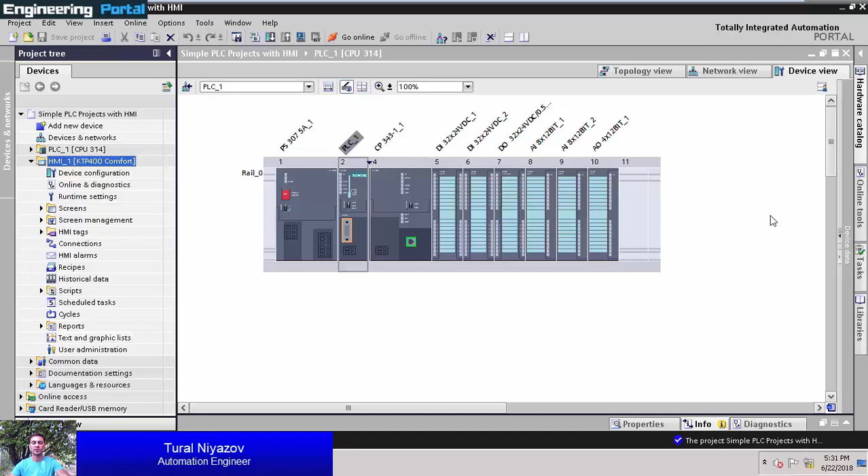This is my panel. For time saving, I created the hardware configuration and also inserted the HMI panel into my project. In previous lessons you learned how to create hardware configuration and add an HMI panel to your project, so I won't do it again.

Let's introduce you to this program. This is the Siemens KTP400 HMI panel. Here I have two tanks. Tank 1 is full with water and tank 2 is free. I want to discharge tank 1, bringing this water from tank 1 to tank 2.

The water levels are measured with level sensors. Level sensor 1 measures the water level of tank 1, and level sensor 2 measures the water level in tank 2.

I have three buttons. The start button's contact is normally open. When I press this button, the contact closes, and when I release it, it becomes normally open again. The stop button is normally closed; when I press it, it opens, and when I release, it closes again. The reset button is also a normally open push button.

Here I have two LED lamps. The green lamp indicates that the system is running, and the red lamp indicates the system has a fault. When the system is running, the green lamp turns on. When a fault occurs, the red lamp flashes.

I have an electromagnetic valve outside tank 1. Water waits here. When I press the start button, this valve energizes and changes to green color, and water goes from the electromagnetic valve to the pump and waits here. The running lamp indicates the system is running.

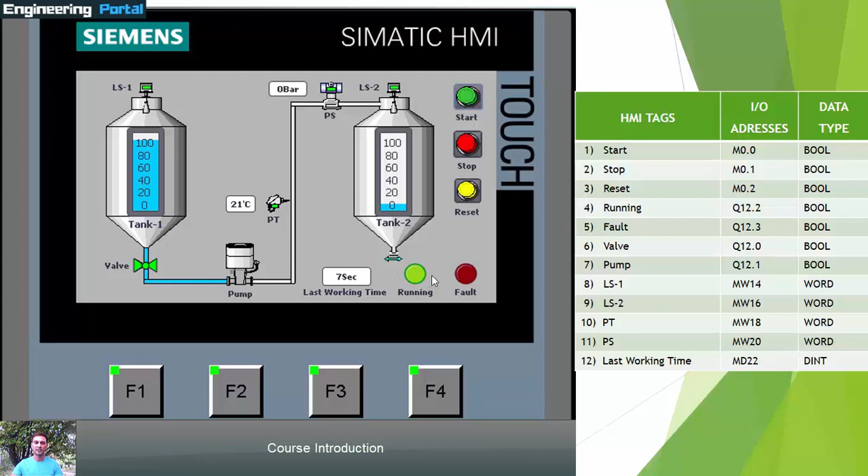After 10 seconds, the water pump energizes. When the water pump energizes, water flows from tank 1 to tank 2, so you can see the water level in tank 1 decreases and the water level in tank 2 increases.

In this tube I have two sensors: one is a PT100 type temperature sensor and one is a pressure sensor. This sensor also works with 20 mA signals.

If a fault occurs in the program, the system stops immediately and the fault lamp flashes, 1 second on and 1 second off. You can ask, when does a fault occur in this program? When temperature is over 30 degrees, when water pressure inside the tube goes over 10 bar, also when the water level in tank 1 is 0, no water inside tank 1, and we press the start button, the error lamp will flash again and we can't start our system.

Also, when our system works, water flows from the electromagnetic valve to the pump, but where is the water? If our pressure sensor doesn't measure water pressure, this means the tube is broken. For this reason, the system stops and the fault lamp flashes again.

In this window we can see the current temperature value, water pressure value, and last working time. If we press the start button and no fault occurs, the system works for 60 seconds. After 1 minute, the system stops again.

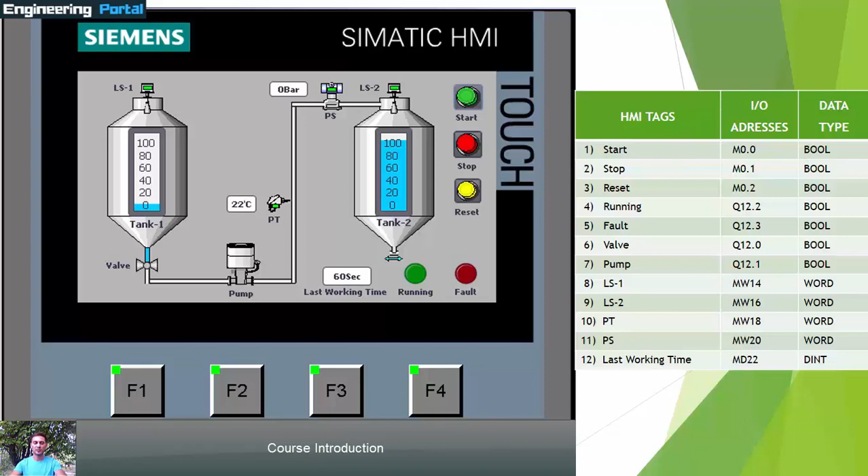Here you can see the addresses. In the PLC programming, we need additional addresses. For time saving, I added this in the default tag table. Today I will write the PLC code of this system and simulate it.

Let's begin programming. For programming, I go to program blocks, main OB1, and add networks. The program will run from network 1 to the last network. First of all, I need to measure the water level inside tank 1 and tank 2.

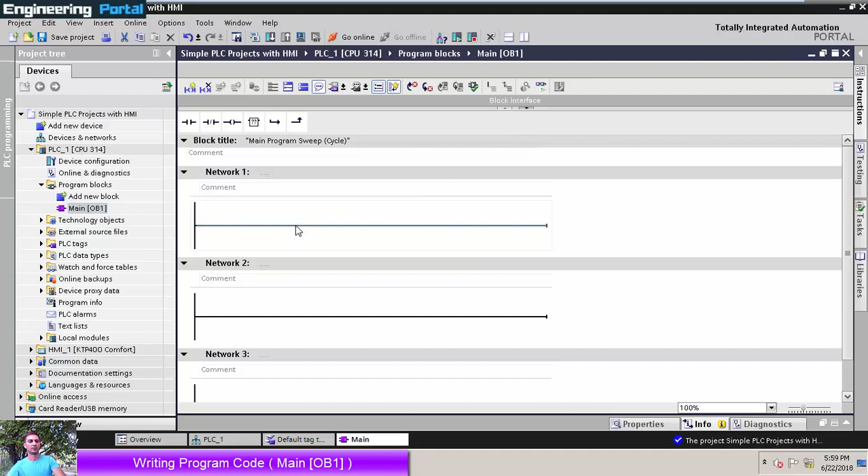Because we use the PLC simulator, we must use move blocks. You can add this block from here also. Block move, okay.

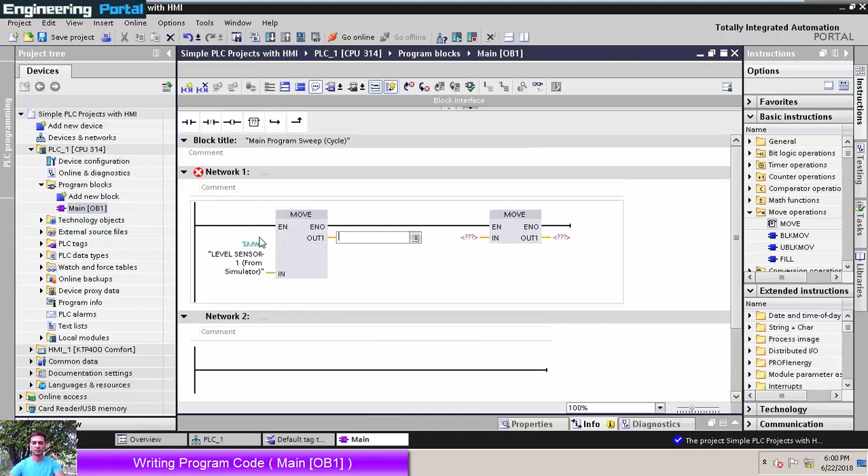I want to connect the level sensor 1 tag from the simulator. This one is memory word 2. I write memory word 2 from level sensor 1 to the destination. And here, from level sensor 2 to the second destination. This means I move the value from memory word 2 to memory word 14, and from memory word 4 to memory word 16.

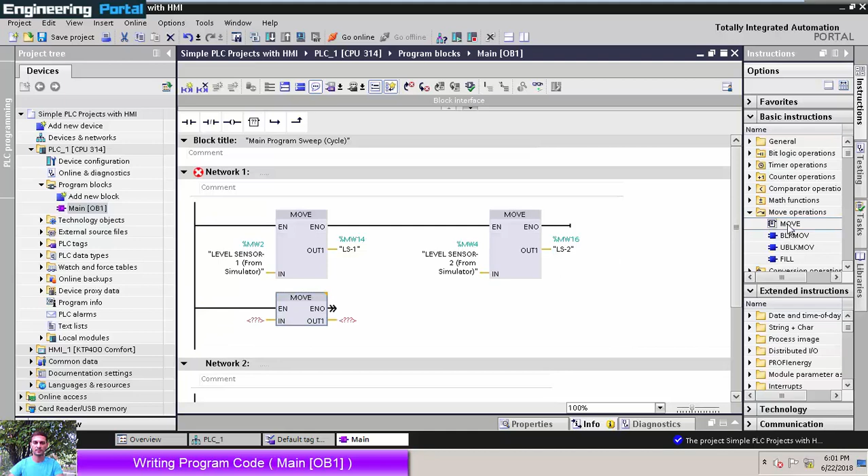I want to measure water temperature and water pressure inside this tube, so I need to add another move instruction. Connect this tag: PT100 sensor from simulator, memory word 6. I move memory word 6 to this tag, PT, memory word 18. I write PT here. Click OK.

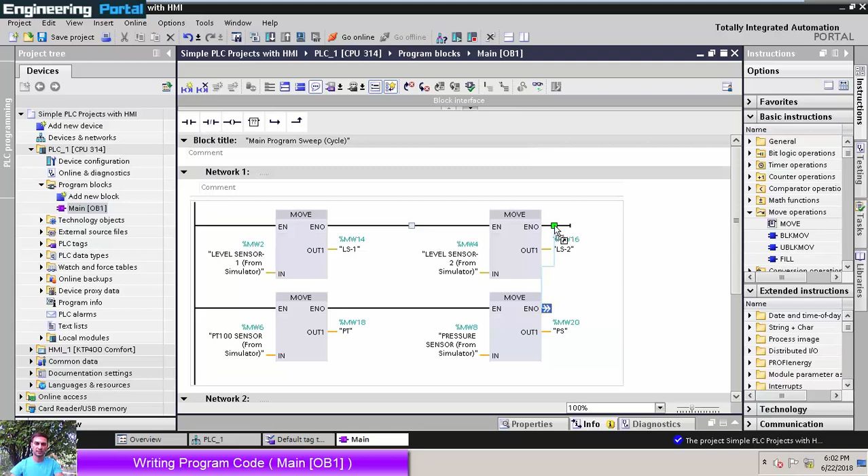Now the pressure sensor: pressure sensor from simulator, memory word 8, moved to the pressure sensor destination. And connect these outputs. This network cannot be left open, so we must add a coil here. Give it a tag, move is OK, M0.5.

This one is analog network.

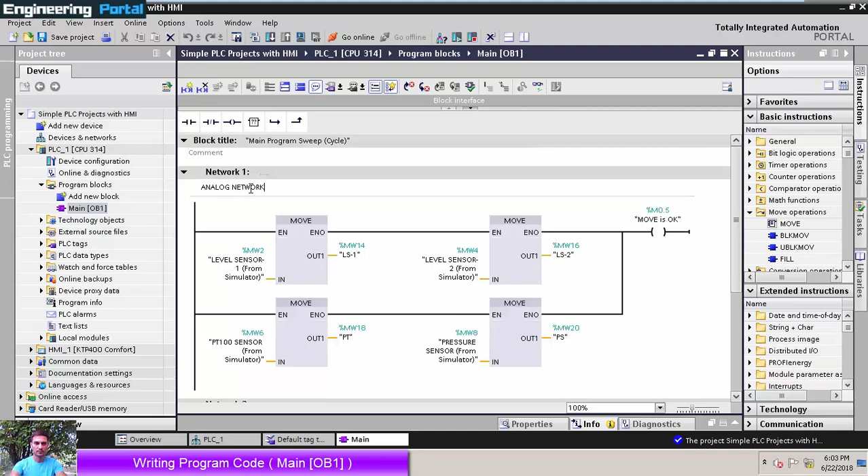Click to save. In the next network, what we need to do? We need to start our system. So I go to add open contact and set reset instruction. We can add this instruction also from BitLogic operations tree and select this one and drag and drop to here. Okay, now we can delete it. Give an address of start button. Start button is M0.0.

This one is run command over stop button. Yeah, we must add negative trigger and give an address for negative trigger 1. Okay.

This stop button is normally closed, so this open contact of the stop button is also closed. And when we push the stop button or wire is broken, this negative trigger passes to the reset input of this block and run command turns off.

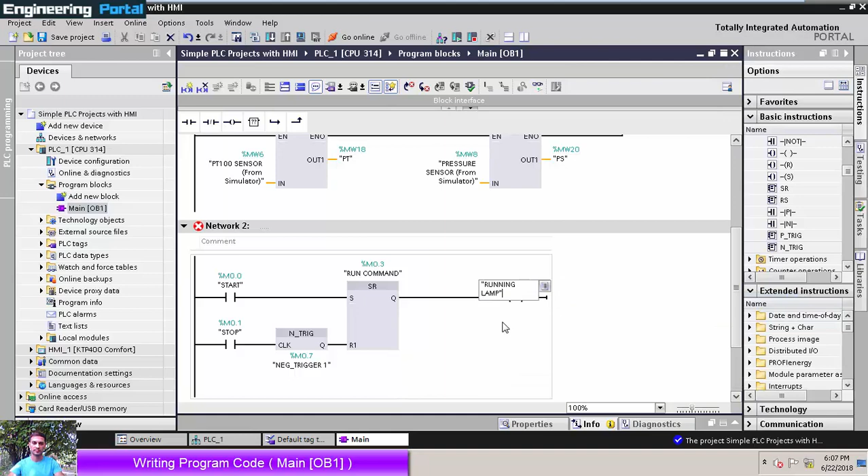So go to the next network. Here what we need to do, then I press the start button, electromagnetic valve energizes immediately. So I need to add open contact and the coil for the valve

and run command. After what's going on, when the valve energizes, water flows from this tube to the pump. The timer started timing. After 10 seconds, water pump energizes. Let's do this.

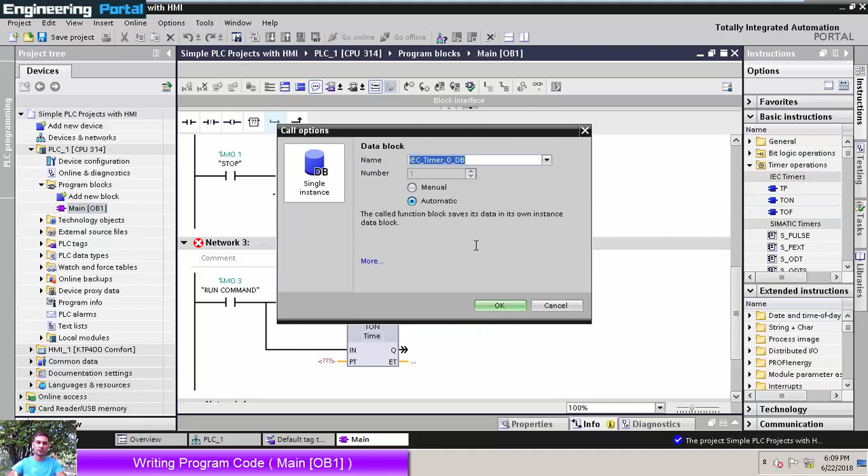Close this, and go to the timer operations. We need to add here on-delay timer. Click twice on it and data block creates automatically. Click the OK button. This timer has 2 inputs and 2 outputs.

In is enable input. PT is preset time value. I need to give 60 seconds to the preset value. Q output is digital output, which will turn on after 60 seconds. Time is end. And ET value is analog value.

So we need to connect this output to the current time value tag. Data type is time, 32-bit value, MD10, okay?

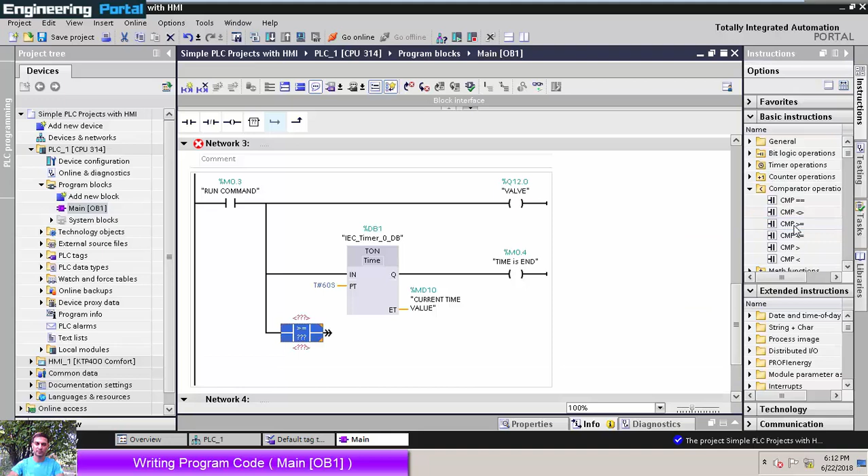What we said, after 10 seconds, water pump energizes. Give a new arrow, put here comparator operations, greater or equal, and another coil. What we need to do, when the current time value equal or greater than 10 seconds, the

pump will turn on. I want after 60 seconds system stopped. So I need to add an open contact, connect it, and give an address, time's end.

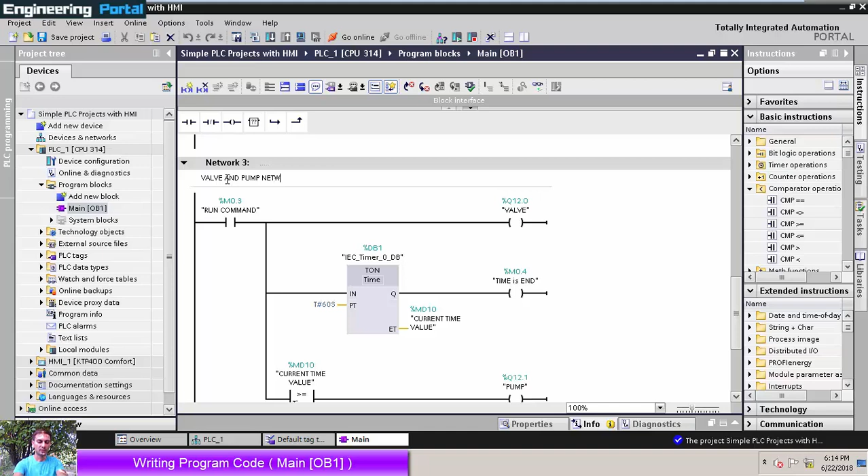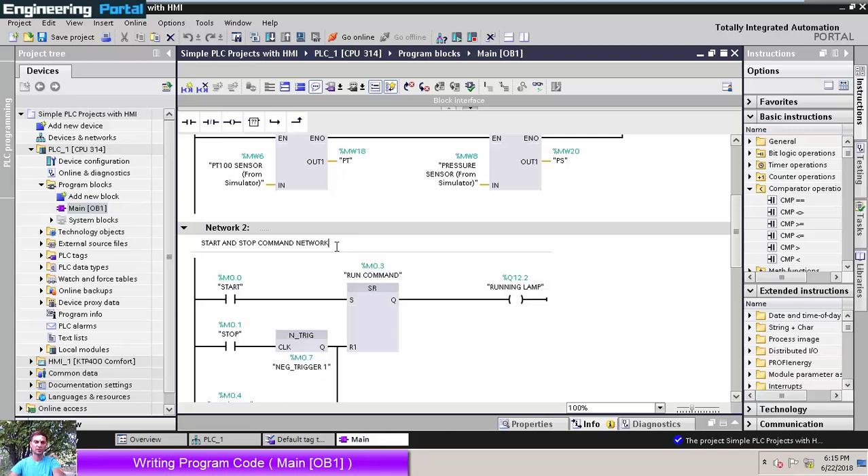Pump network. One is start and stop command network, and new network is fault network.

What I said, if the water temperature is greater than 60 degrees Celsius, fault turns on. I need to add a new set reset instruction to here. Put here comparator greater than instruction and give an address. When the PT value is greater than, select data type, you can see here PT data

type is word, not integer. But this instruction has only integer value. Integer also 16-bit data value. So we can select integer here. Give a tag name for the fault.

If fault occurs, the fault lamp turns on. And another greater than instruction. And this one is pressure sensor value. This means when pressure sensor is over 10 bar, fault is turned on.

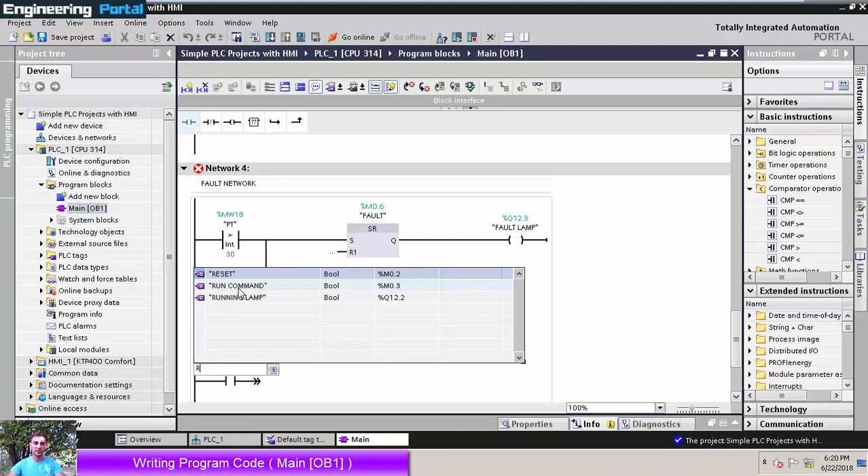If the water level inside tank 1 is 0 and we want to start our system, fault turns on again. I need to add another open contact, give an address run command when starting our system, and water level of tank 1 equals 0. We can't start our system.

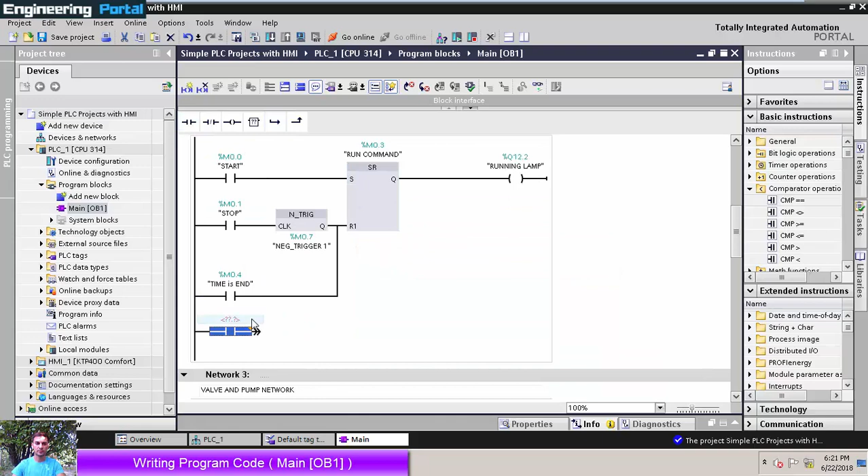If the fault occurs, we can't start. Okay.

After what we said, if we started our system, valve and pump energized, but water pressure is 0 here. So we must stop our system.

When we have a run command, put another arrow, put here, and open contacts of the valve and the water pump.

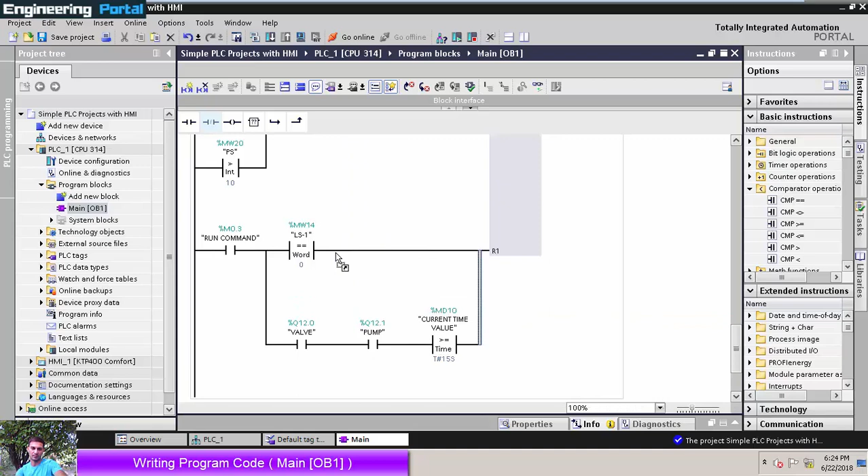And another comparator instruction, greater than, and give an address of current time value. If then is low to 15 seconds, we say.

This means if we started our system, electromagnetic valve energized, water pump works after 10 seconds, and when water pump energized after 10 seconds, water pressure still is 0, fault lamp indicates again.

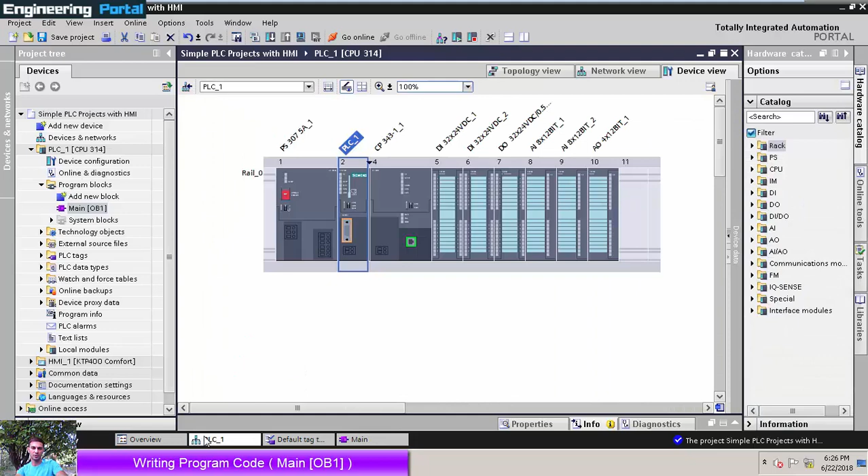Okay, I want this red lamp flashing, 1 second turns on, 1 second turns off. So we can use here clock memory bits. When you go to the device view, click device on PLC and go to the clock memory.

By default, clock memory is not activated. You can activate it and give an address. We can add memory byte between 0 to 255. So I want to use memory byte 100 and click OK.

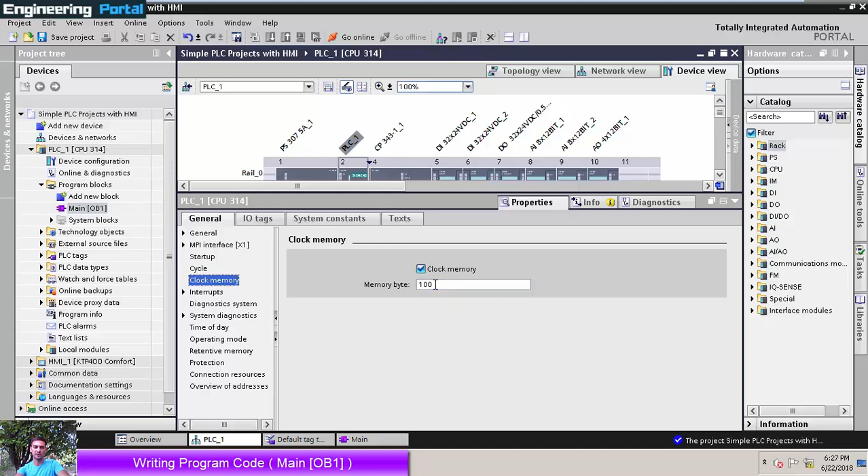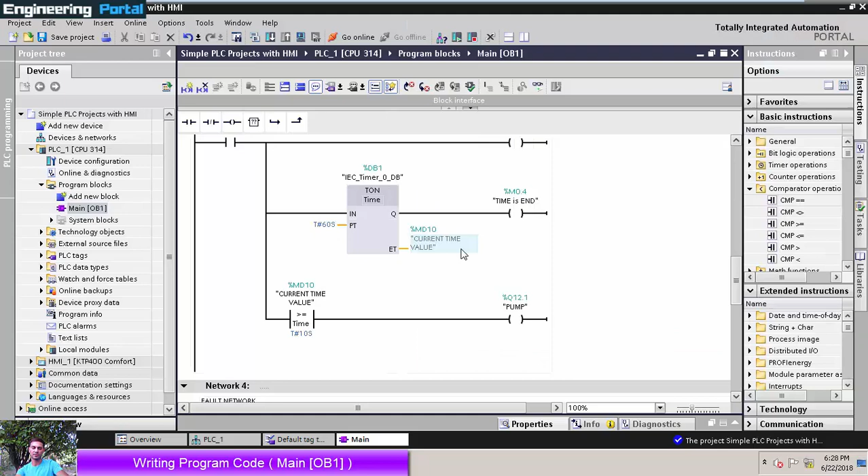Close this window. I added clock memory bit, clock time for 1 second, M100.7. The relay timer current time value is in milliseconds, but I want to see the second values in the HMI, not milliseconds.

So what I need to do is divide this current time value by 1000. Go to the math functions and put a new block here. This block divides input 1 by input 2 and writes it to the output. Current time value divides by 1000. Data type is double integer, also a 32-bit data value. Write it to the last working time tag, MD22.

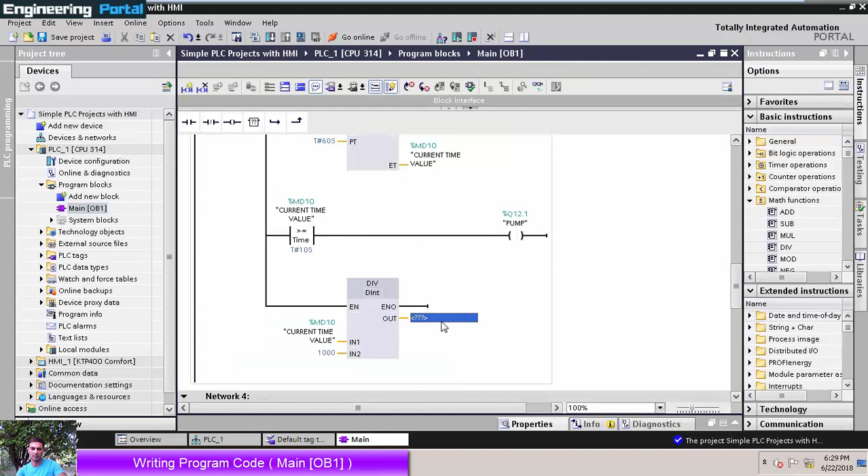Excuse me, I have a little problem. These wires are connected to the reset input, but we need to connect them to the set input instead. Delete this wire and connect it to the set input.

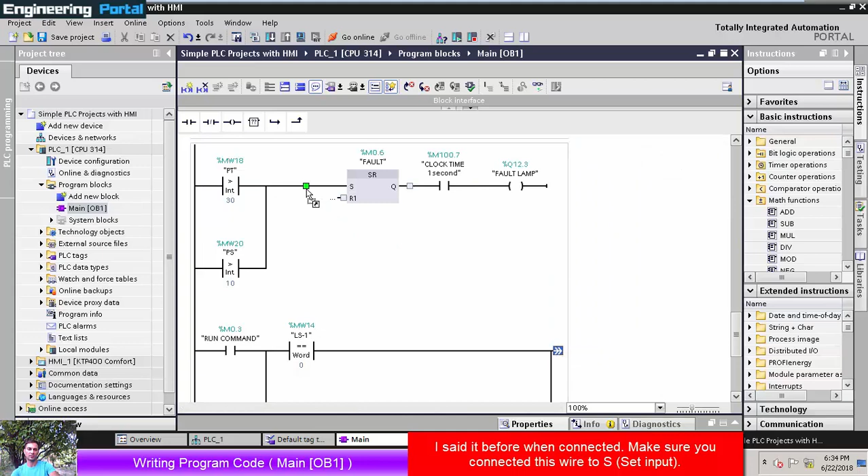When the fault will reset, if we press the reset button, when I press the reset button, this block must be reset.

What I want to do: pressure value is not equal to 0, is less than or equal to 1 bar. Select data type as integer, because if the water pump has a problem, water will flow with lower pressure. 1 bar is the lower pressure threshold for this project.

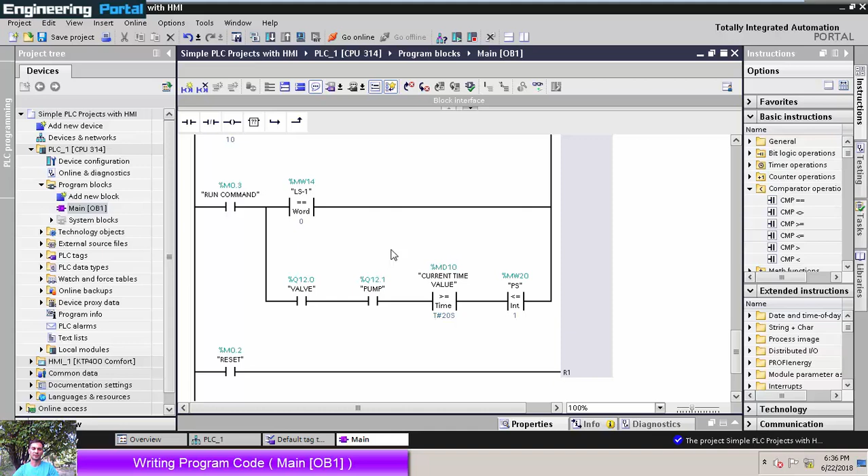Now I can connect these tags to the HMI panel graphics. Also, right click on the PLC and go to the assignment list. In this list, you can see what memory bytes are used in this project and what is free, along with input bytes and output bytes.

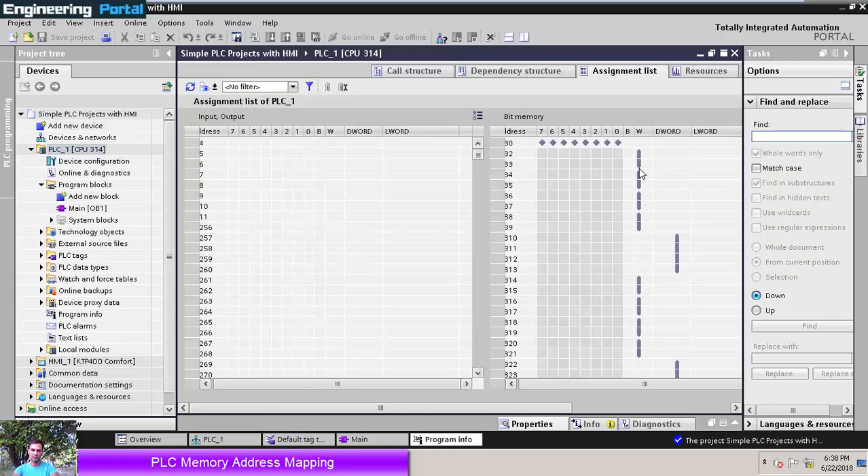Timers and counters are used here. This blue light shows which addresses are used and which are free.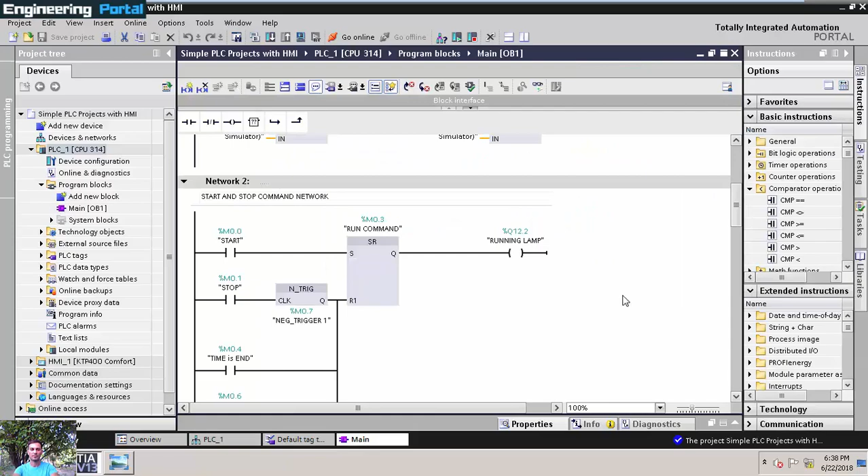Now we can simulate our program. Select PLC and click the compile icon. You see here, no errors, no warnings. Click the start simulation button. Because I'm using Profinet communication, I must select TCP/IP.

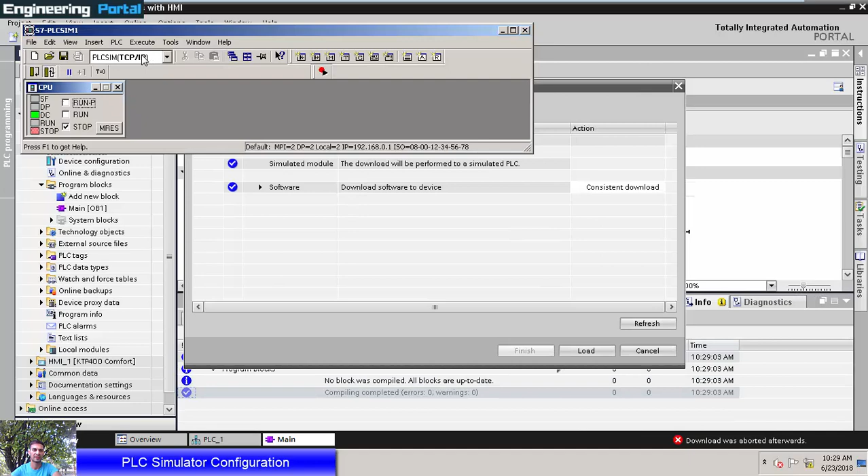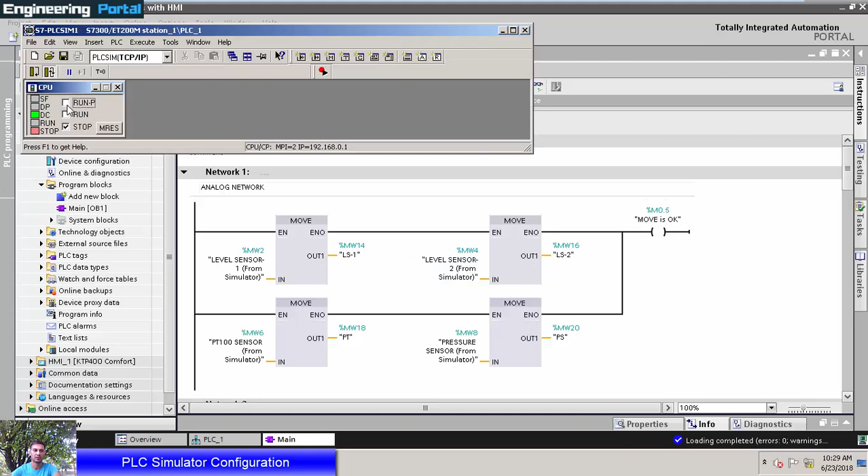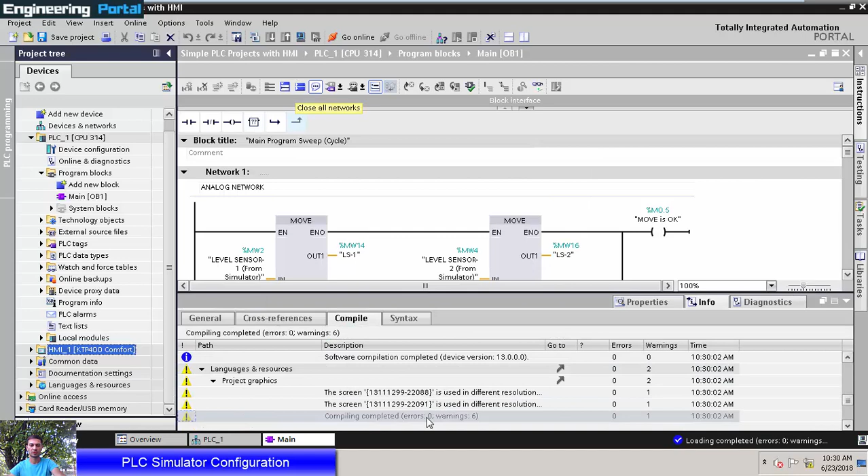Click to load our program to the simulator. The simulator works like a real PLC. Now we must click to run the program, then click the HMI icon, compile, no errors, and click the simulation icon.

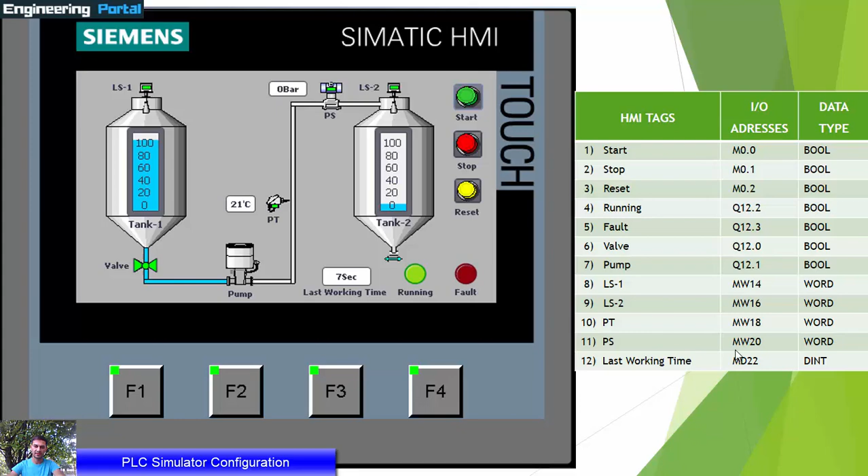Connection established. What we need to do is add these addresses for simulation. Now we need to add input-output variables.

I go to the PLC tags folder and insert an input variable, memory byte 0. Memory bit 0.5 is true, and we can see it here.

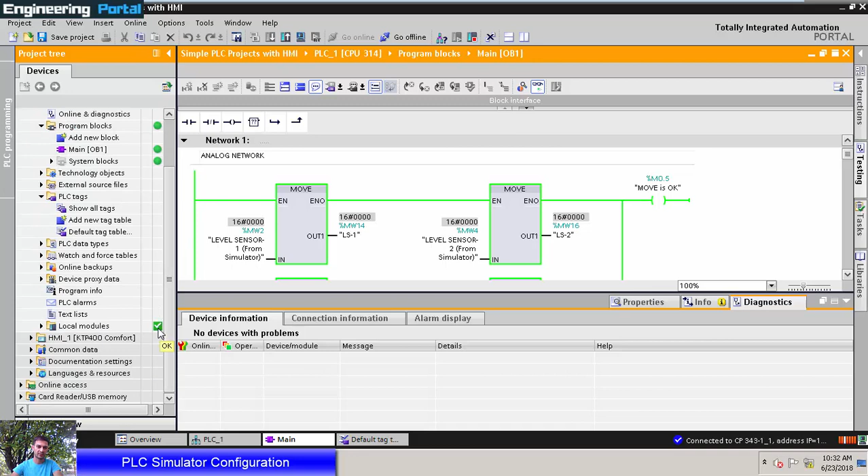Go to the main program, select our PLC, and go to online mode. If everything is green colored, that means okay, no problem. This one is M0.5, the move block is okay, that's true.

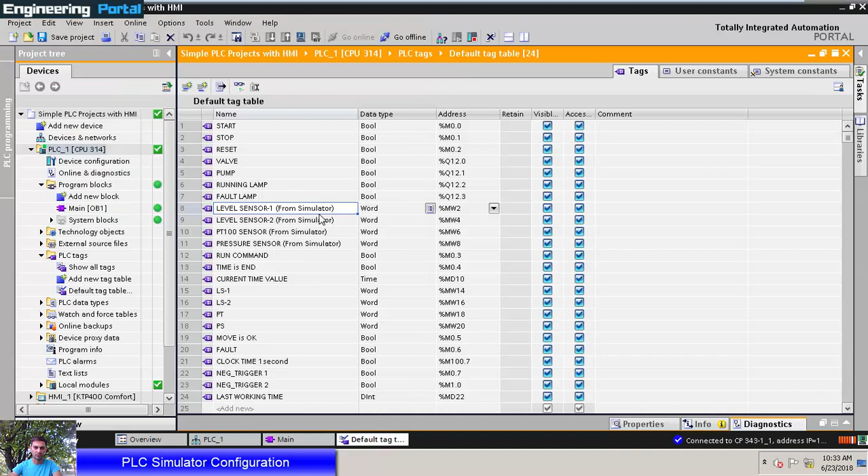What I need to do now is add the input variable: analog values from memory word 2 to memory word 8. Click to insert input variable, memory word 2, memory word 4, memory word 6, and insert input variable, memory word 8.

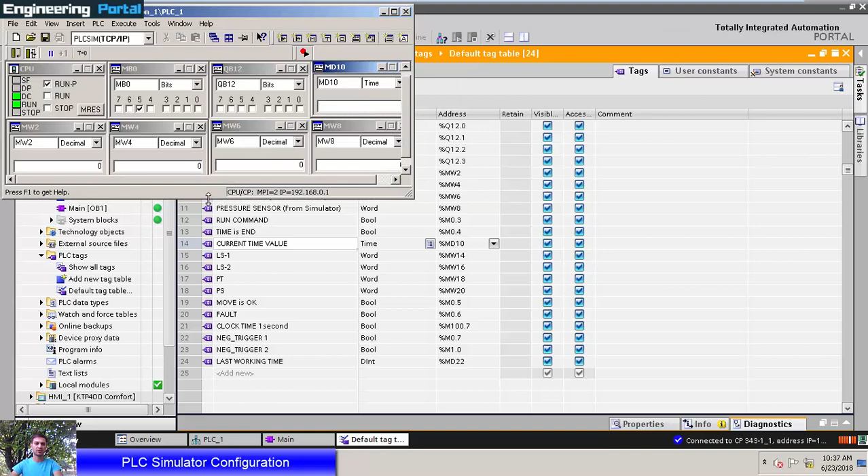Give a name to this address: current time value MD10, data type is time. Configuring our simulator is finished. Close the project tree also, and open the simulator and WinCC runtime.

So what I need to do: we said tank 1 is full with water, level sensor 1 shows 100%. Now you see here, for better understanding, I right click here, modify, display format, decimal. Now you see 100.

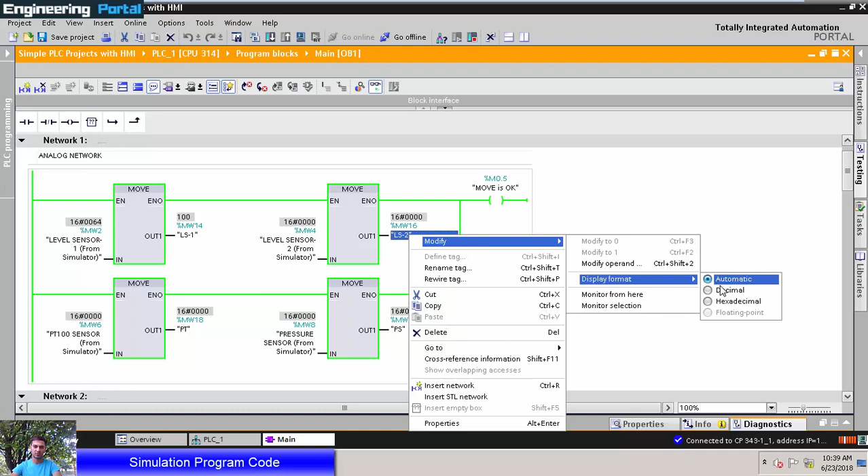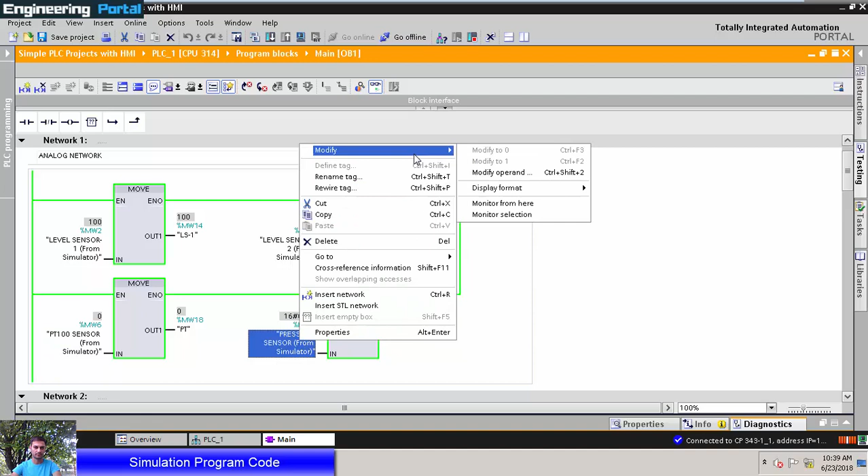Modify to decimal. Okay, our program works fine. Now waiting for the start command.

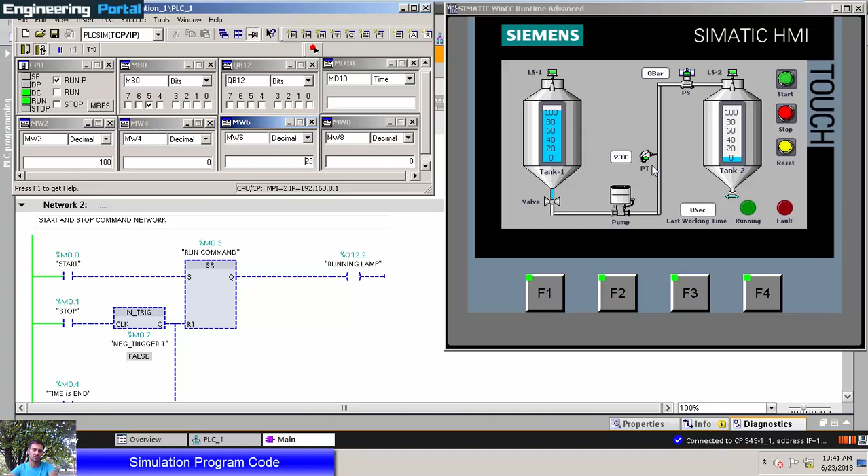I click to always on top. The PT100 sensor temperature shows us 0 degrees. The weather temperature is 23 degrees. Now you can see it here. When water is not inside, this measures the weather temperature.

We can start our system now. I click the start button. Start command comes, valve energizes, water comes from the valve to the pump, and waits here. After 10 seconds, the pump energizes and water comes to this tube.

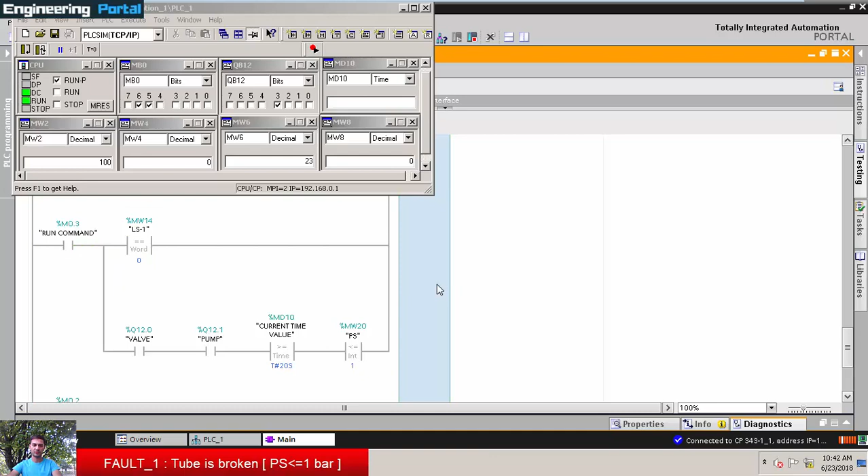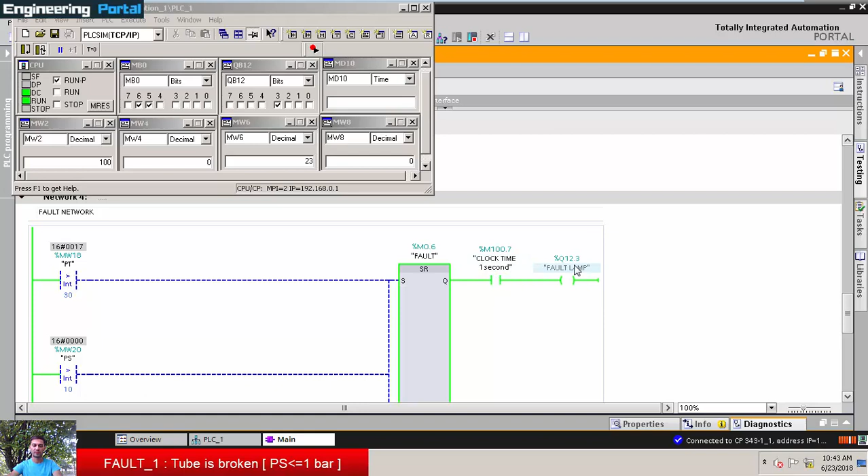Now you see, after 20 seconds, water flow is not detected here. You can see the fault network, reset system run command, valve energized, pump worked. You see here, last working time. Water pressure was lower than 1 bar. For this reason, this fault block energized, the clock time memory bit works, and the fault lamp indicates here.

We can reset our program and start it again. Started, valve energized, 5 bar, okay, and water decreases from tank 1, water increases in tank 2. You see?

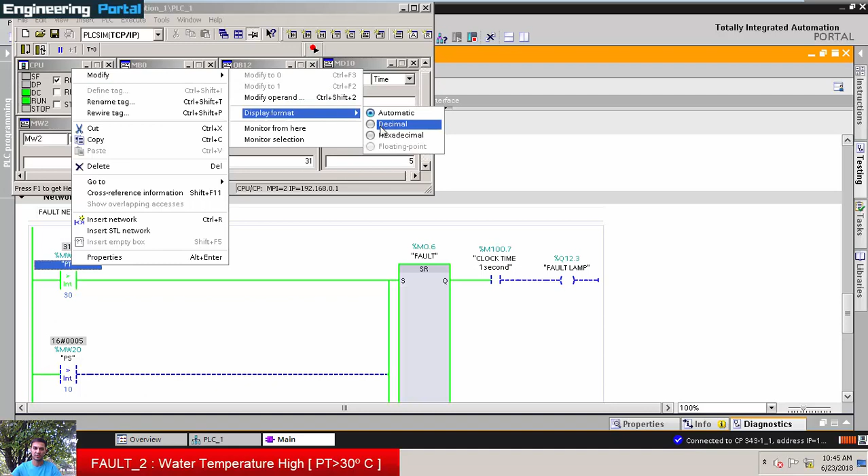Now fault becomes true again. Temperature value over 30 degrees. You see in the fault network, modify display format to decimal, and you see this line works because the water temperature is over 30, it's 31 degrees. This fault block works again and fault lamp flashing.

I go to press the reset button. Block resetted, but input of the block is still true. So when I release this button, fault appears again. Give another error.

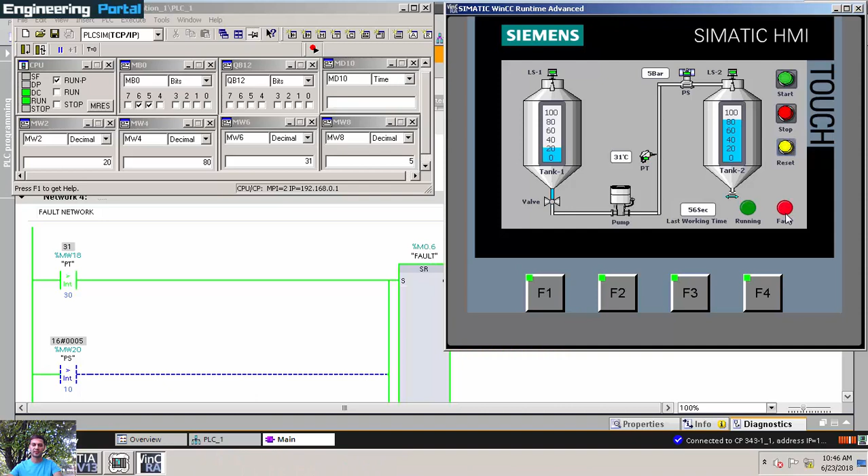While our system stopped, the water pressure goes down. Water temperature also. And now we'll start again. I click the start button.

System works. Water decreases from tank 1, increases to tank 2, and water pressure goes to 12. System starts again, and fault indicator flashes. Come to fault network, and we see here this line activated.

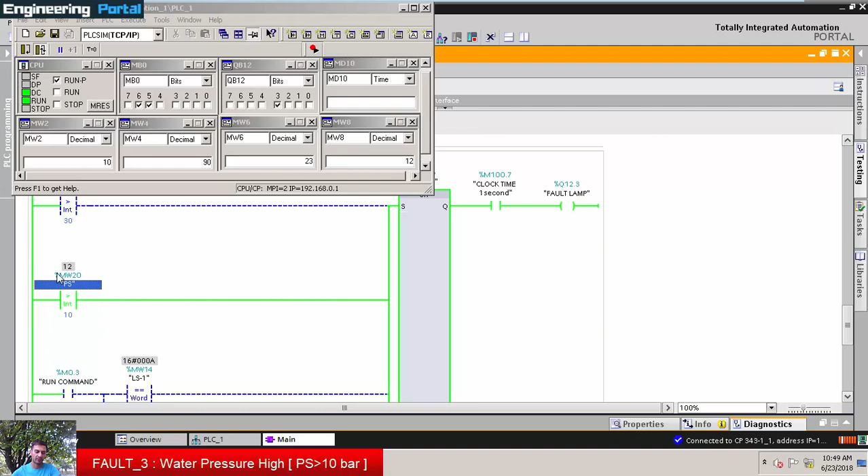Modify display format to decimal, and you see when pressure sensor value is over 10, fault becomes true. And when I click the reset button, I can't reset this program. When pressure goes down, I can reset the program.

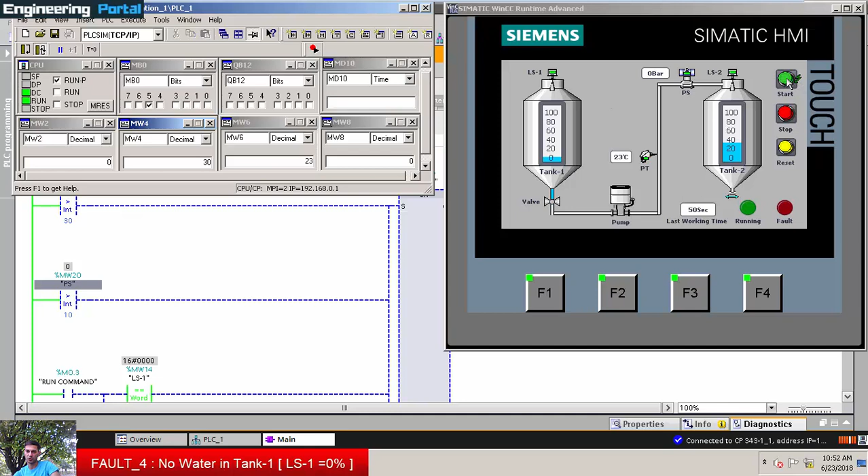Give another fault. If water level in tank 1 is 0 and water level in tank 2 is 30%, I push the start button. What's going on? System won't start. Water level of sensor 1 is 0, and when I press the start command, this block energizes again, and fault indicator comes here. I need to reset and add water to tank 1.

Give another problem to the system. If water level in tank 1 is 40% and in tank 2 is 30%, I click the start button. System works. After 10 seconds, pump energized.

Water comes from here. Pressure, you see, water level goes down in tank 1 and up in tank 2. After tank 1 reaches 0, you see here fault appears again, and here is no water, water pressure goes down.

Okay, fault appears for that reason, because I started our system, run command I have, and the level sensor 1 becomes 0. System protects our water pump. Here is no water and pump can't work. So we need to reset and add water to tank 1.

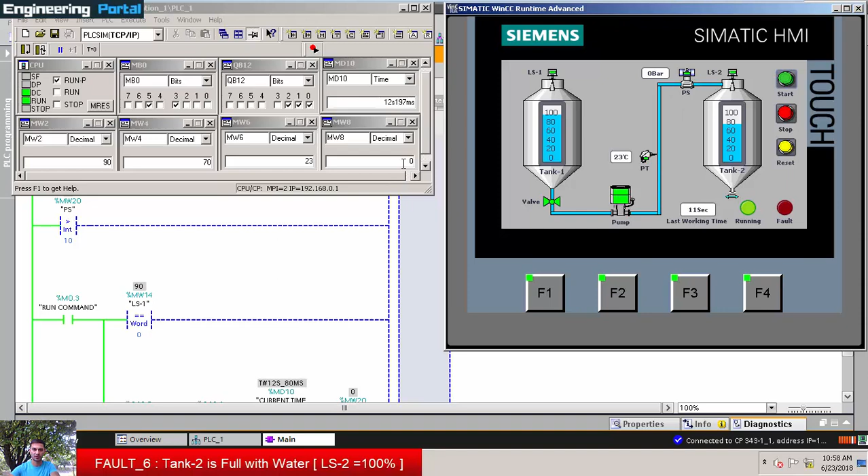Pressure becomes 6 bar. Temperature goes up. Tank 1 decreases by 20%. And tank 2 increases by 20%. Okay. After that,

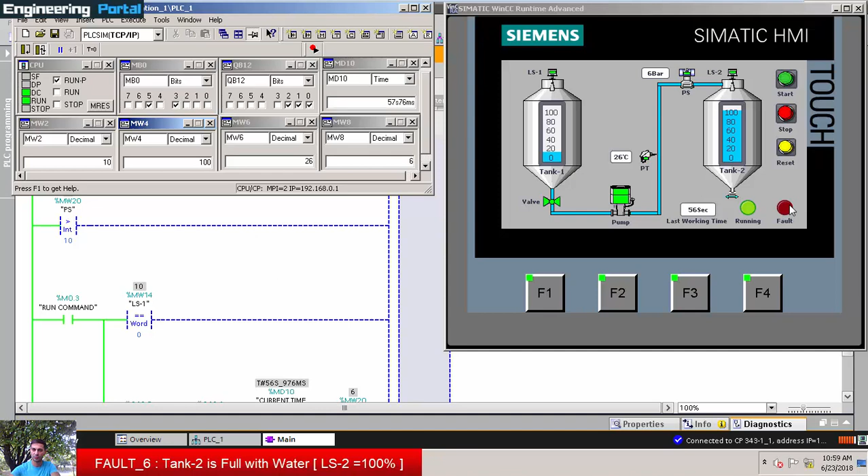Tank 1 decreases by 10%. Tank 2 increases by 10%. Tank 2 is full, but our system is still working. Why? We can't protect the system. No fault indicator here. So we need to do that.

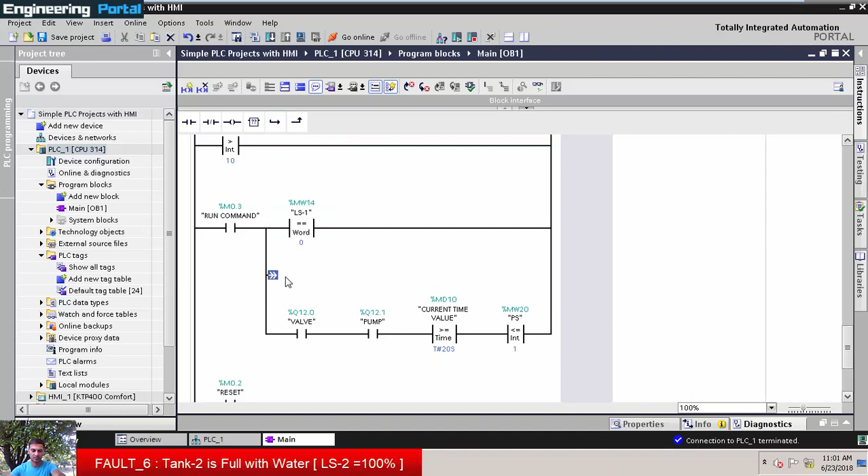Close this window. And go to offline mode. If I have a run command, give another comparator instruction, copy this one, add an arrow here, paste it, and connect it to this wire.

So what this means is, if I have a run command and tank 2 is full, fault indicator appears again and system stops.

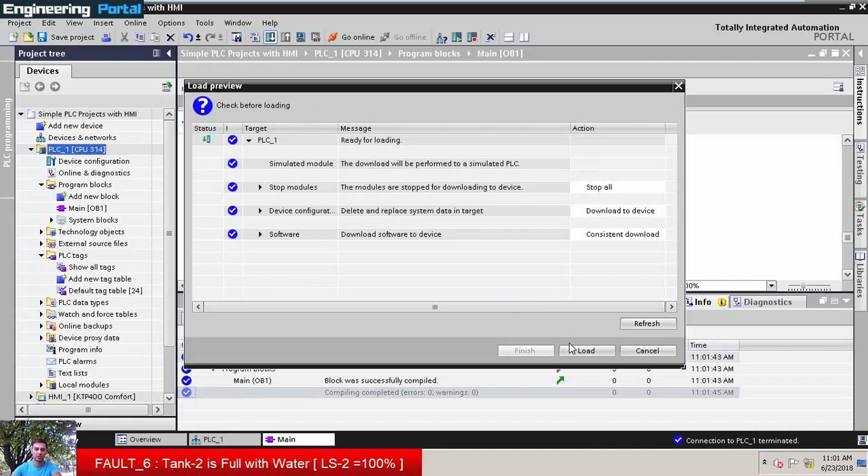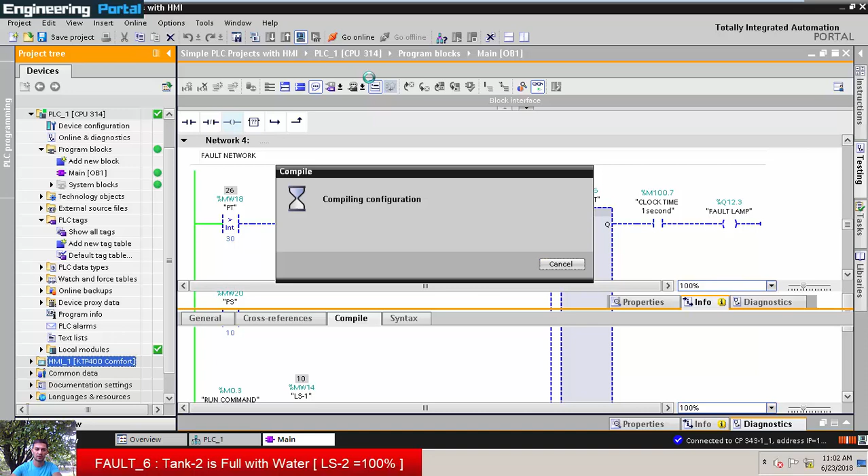Okay, now I can download this code to the simulator, finish, go to online mode, and click to HMI panel and start simulation.

Okay, close this tree. Let's do this again. Click the start button. System started working.

After pump working, pressure appears here. Water decreases in tank 1 and increases in tank 2. After decreasing in tank 1 and increasing in tank 2 until full.

Okay, now program works fine. System stopped and fault indicator flashed again. And you see here tank 2 is full with water. For that reason system stopped.

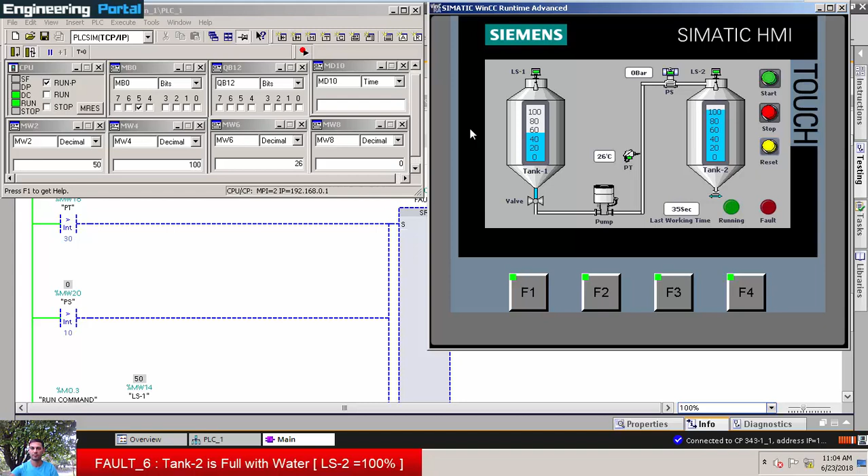Because system is stopped, water pressure goes down again. Now we can reset. If the system has no problem, it works for only 60 seconds. Give another example. If tank 1 is full, tank 2 is free, and I go to start our system. System works fine.

After 10 seconds, pressure becomes here. Tank 1 decreases. This running indicating lamp indicates the system is running. Okay.

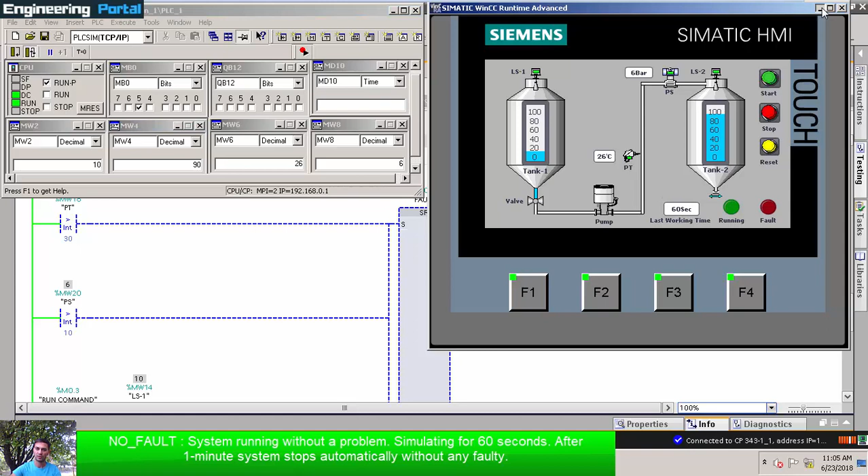Now you see system stopped because I used here a timer value for stopping our system. Start-stop network, and here time-is-end command. When the timer value becomes 60 seconds, time-is-end output activates and stops our system.